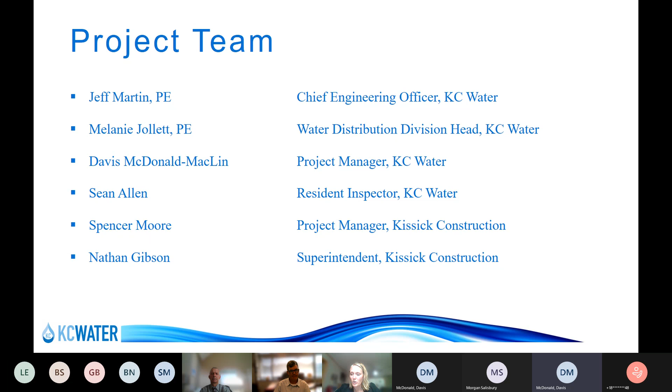Okay, next slide. To kick us off, I'm going to turn it over to Jeff Martin, and he's going to give us a quick background on KC Water and water services and the utilities that we offer and provide.

Thanks, Melanie, and thanks everybody for joining us here tonight. We do like to take just a minute to review the fact that here at KC Water, we actually are 3 utilities in one. A lot of people think of KC Water as just your water utility provider, but we also provide wastewater utility services, and the stormwater management for the city as well.

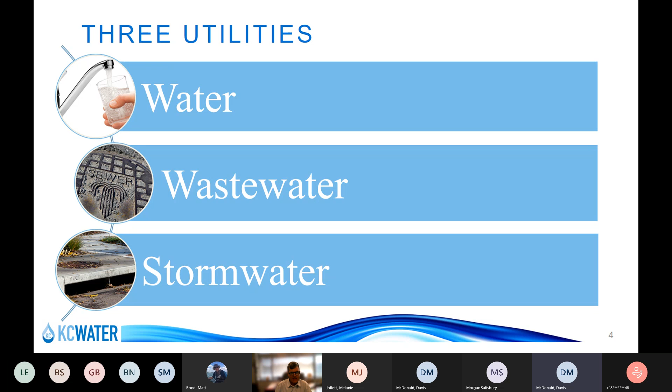In order to provide all those services takes a lot of assets and a lot of staff. For the water utility side, we have 1 water treatment plant that serves the city and all of our customers. We have about 18 pump stations to move that water around through over 2,800 miles of water main. That's really what this project tonight is about, replacing the water mains for that distribution system. We also have another 35,000 valves and 23,000 fire hydrants to support all that infrastructure.

On the wastewater side, we actually have 6 wastewater treatment plants, 3 along the Missouri River and 3 along the northern city limits, that serve the entire KC Water area. And then another 39 pump stations, 2,800 miles of sewer mains, and 67,000 manholes spread throughout the region that allow us to access those sewer mains to clean them and keep them up.

And then the third utility, the stormwater utility, which seems like the most forgotten about one. We have another 630 miles of stormwater pipe running throughout the city, and 53,000 inlets along the streets and curbs to collect that water. A lot of people also don't realize we have about 13.5 miles of levees along the rivers and smaller rivers that run throughout the city to keep the flood prone areas dry. So a lot of assets go into providing the utilities for all our customers.

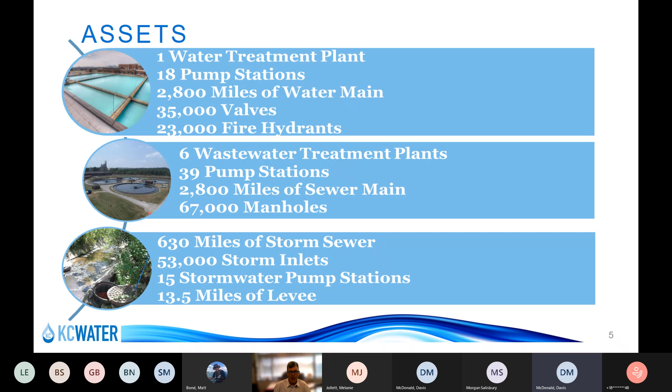So really all three of these tie back to our one water source, which is the Missouri River. Not only do we pull our drinking water from here to treat and distribute, but it's also where all the stormwater eventually ends up, as well as the discharges from our wastewater treatment plants after the water's been treated and cleaned up. So it's really important that we maintain that water system so it's usable, keep it clean, and viable for the future to keep providing water not only to Kansas City, but throughout the region.

And with that, I'll turn it back over to Melanie to talk about our water main replacement program.

Thanks, Jeff. So just a quick background on our water main replacement program. As mentioned, this is the public meeting for the water main replacement project. Kansas City Water's distribution system includes about 2,800 miles of water main. Many of our mains date back to the 1800s, so we have a challenge with aging infrastructure, where we see significant main breaks and other operational and maintenance challenges. This is a nationwide challenge, not unique to Kansas City or our utility.

But about 8 years ago, we developed this water main replacement program. The intent of this program is to replace 1% of our infrastructure every year, which equates to about 28 miles of water distribution piping replaced annually. We're in our 8th year, and to date we've replaced more than 200 miles of distribution main, so we've seen significant progress within this program.

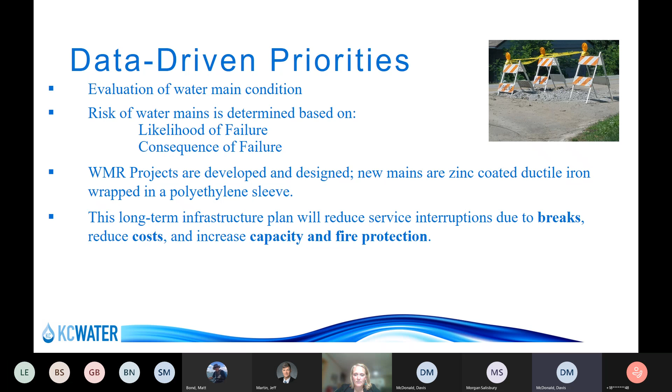What happens a lot of times with some of our old smaller diameter cast iron pipes and older pipes is we see tuberculation or buildup of deposits within the pipe, which reduces the inside diameter. These new pipes have the full diameter of the size we put in, so it really does improve fire protection throughout the city for our customers. Next slide, Davis.

So with that, I'm going to turn this over to our project manager, Davis, and let him talk about some specifics to this project.

You are muted, Davis. There we go.

Good evening, everybody. My name is Davis, I'm the project manager here at KC Water for this water main replacement project we're going over this evening. We're calling it Broadway Boulevard to Holmes, West 17th Street to 18th Street. As you can see, it's made up of multiple segments—there's about 10 segments here, and most of them are about 400 feet.

There's some where we're replacing two mains that are in the same street, so the total linear footage for the project is about 5,000 feet. We're going to be replacing mains ranging all the way from 4 inches in diameter up to 30 inches in diameter. Some of those mains are going to be upsized drastically, while others are just going to be replaced with the same diameter that's currently existing.

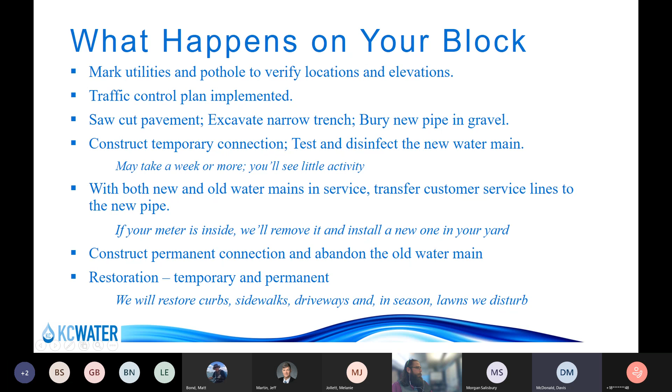So here's what to expect. This is kind of in line with what we just talked about.

There's gonna be large equipment. Typically there's some saw cutting that happens, some slurry and mud. It's kind of a mess, but that will get cleaned up and minimized. Backfilling and excavating, there's some dust that happens there, and sometimes the street gets dusty. So all those impacts will be minimized to the best of our abilities during construction.

And then any sort of driveways, curbs, or pavement will be restored to the public works standard, so we won't just leave it tore up. And I don't know if this really applies to us here, but any sort of lawns will be seeded or sodded as needed, as long as it's not snowing or 100 degrees outside.

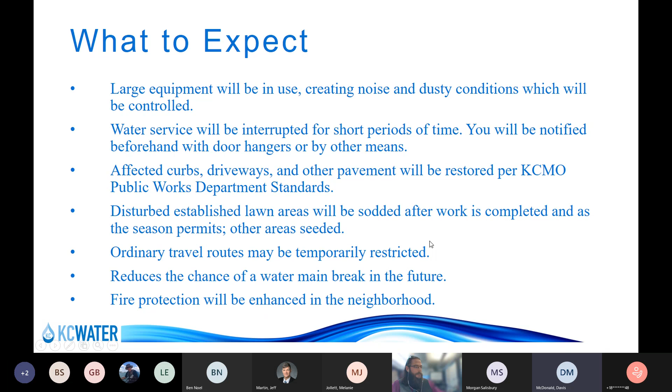And then fire protection - I feel like a nerd getting excited about this, but part of the design for these water main replacement projects is to make sure we have adequate fire protection, as far as hydrant spacing within a roadway, and also, as Melanie was mentioning, we use the hydraulic model to make sure we have adequate flow for these fire hydrants and for the fire protection systems within buildings. That's something I think is awesome, and I look forward to adding that value with this project.

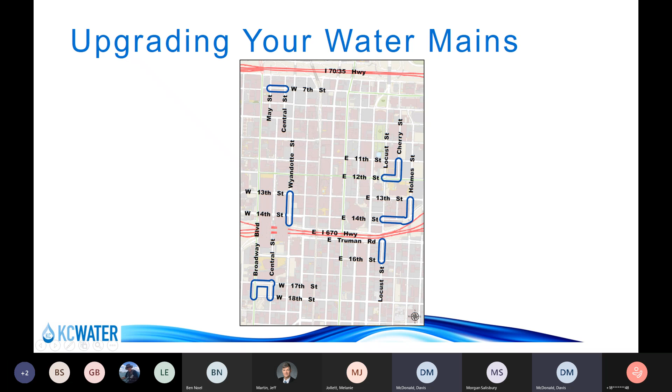Did someone have a question? I heard a note or a little chime. Jeff, did you see anything? Yeah, there's been a little back and forth. Lindsay asked a great question about prioritizing the projects. Lindsay, perhaps Melanie can show that to you in a separate meeting, how we do that. Sounds like you have some knowledge.

Oh yeah, I see that. I'll jump in here really quickly, Lindsay. As I was mentioning in the chat, every year we go through a pretty thorough risk assessment, where we look at the consequence and likelihood of failure of all of our assets, and we take out the projects that have previously been replaced as part of the program. We do update this yearly.

So we don't have an overall master plan, but yes, we'll put Davis's contact information up there. If you want to schedule something with Davis and myself offline, we can run through what we looked at, and maybe get together some sort of visual and show you the projects we've completed to date. But we won't be able to project out much further than probably the next fiscal year.

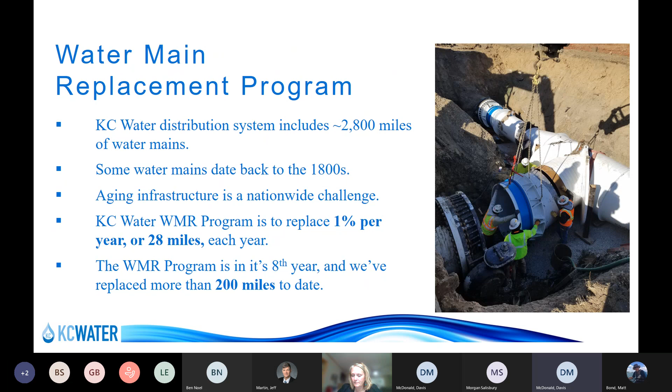Cool, I love it, I love a good question. So we went through the little pictures here. Spencer let us know we're looking to start on 7th Street and then on Wyandotte Street, maybe around the same time. If not, those are going to be the first two segments that Kissick's going to start installing the new water main on.

Everyone should have gotten a postcard from KC Water with a brief overview of the project. But you can always go to kcwater.us/projects/current projects. Even if you just go to kcwater.us, it's pretty intuitive — there's tabs up at the top, click projects, current projects.